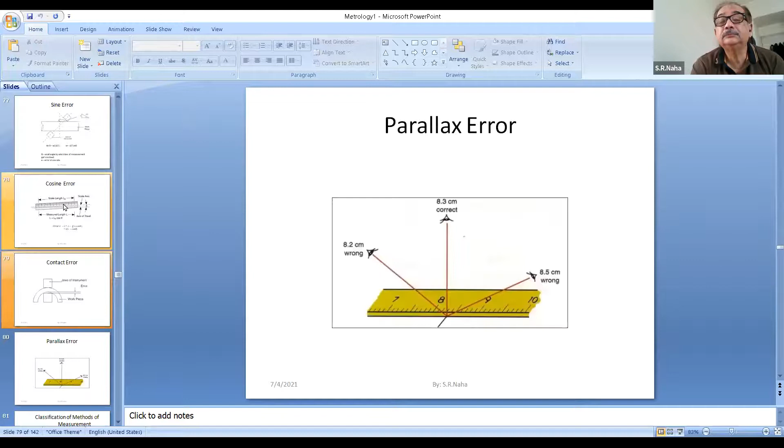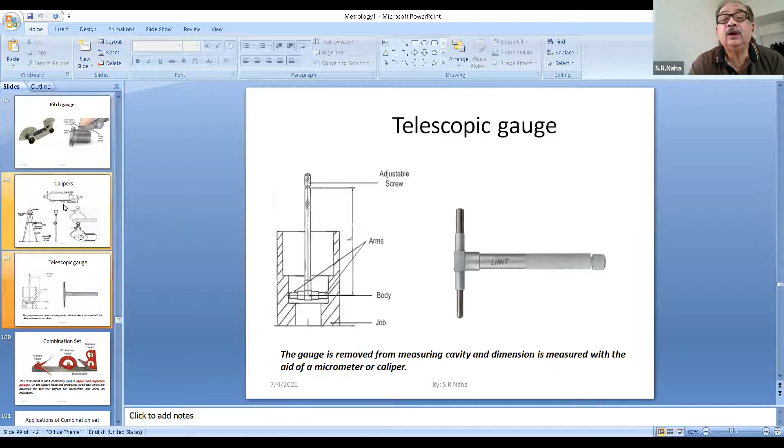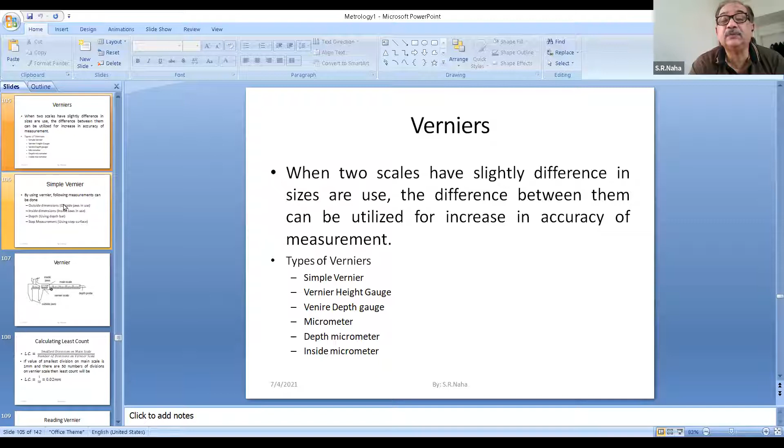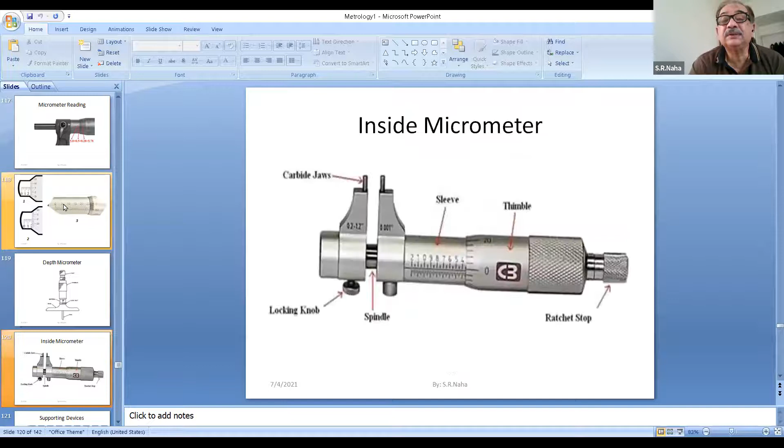In the last few classes, we were discussing the different instruments used for linear measurements. We saw some non-precision type instruments, and then we saw some precision measuring instruments like vernier, different types of vernier scales like simple vernier scale, vernier height gauge, depth gauge, micrometer, and depth micrometer. So all these things we have seen about linear measurements.

I had shown in the last class a video of how to take readings out of a vernier caliper. From this week, the practical online practical classes will start, so I'll show how to take measurements with the vernier scale as well as with the micrometer. All these things we will cover in the practical classes.

Now all these things belong to what type? We know there are basically two types: one is line standard and one is end standard. Whatever we have discussed till now, these were all of line standard only. Now let us see the end standard also, because there we take the advantage of the two ends of a component. This supporting device we will discuss later on.

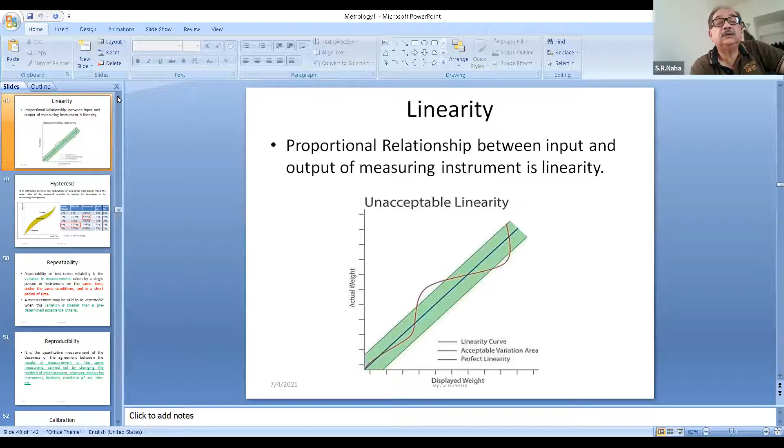So let us now move on to that, and for end standard, one of those is the slip gauge. In brief, I had mentioned in earlier classes about slip gauges. Let me go back to those slip gauge slides.

So we talked about the slip gauges. If I go back a little bit, this is the line standard and the comparison of different standards like line, end, and wavelength standard. We have seen some of the instruments that we use for line standard and end standard, as you can see here, examples are already there.

The steel rules which we used, the non-precision type, that was an example of line standard. For end standard, the vernier that we use there, we use the two ends of the component, so that comes under the end standard. Another one for end standard is slip gauges.

Now let us see what is the slip gauge, because slip gauges are very very important inspection tools, and these are also being used for measuring, mostly they are being used for measuring angle accurately. Let us try to understand what is a slip gauge.

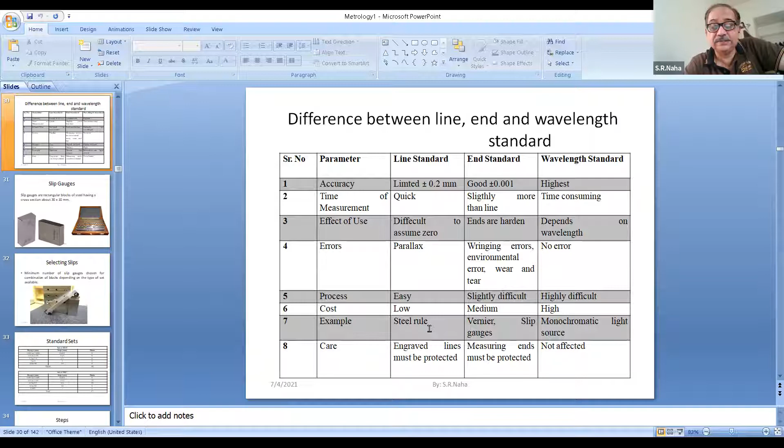The slip gauge, these are some rectangular blocks of steel having a cross section about 30 by 10 millimeters, as you can see here. Their thicknesses vary, and they are very, very precise blocks.

What is a slip gauge? This is also called gauge blocks. Slip gauges are known as gauge blocks, they are precise measuring instruments. These slip gauges are universally accepted as a standard of length. Slip gauges are rectangular in shape, made up of high-grade steel with very close tolerance. The working face of any slip gauge will be made truly flat and parallel.

Slip gauges will undergo hardening to resist wear and tear. They will be further heated and cooled down successively to remove the hardening stresses induced during the hardening process. The slip gauge can be made up of tungsten carbide because of its extremely capable hardness and wear resistance. The size of the slip gauge is permanently marked on any of the measuring faces of the individual slip gauge.

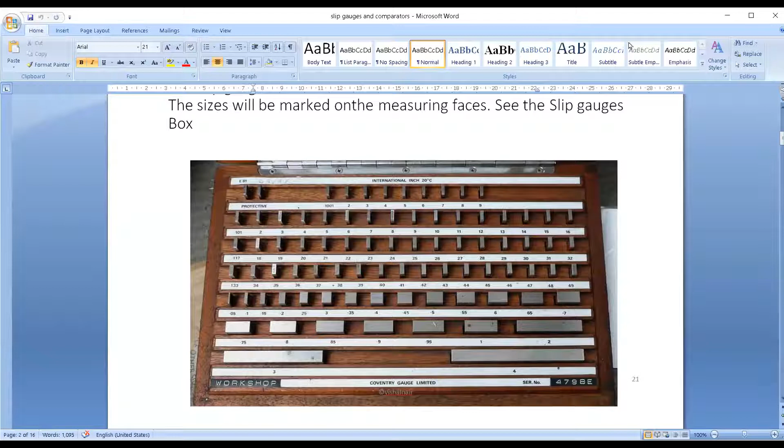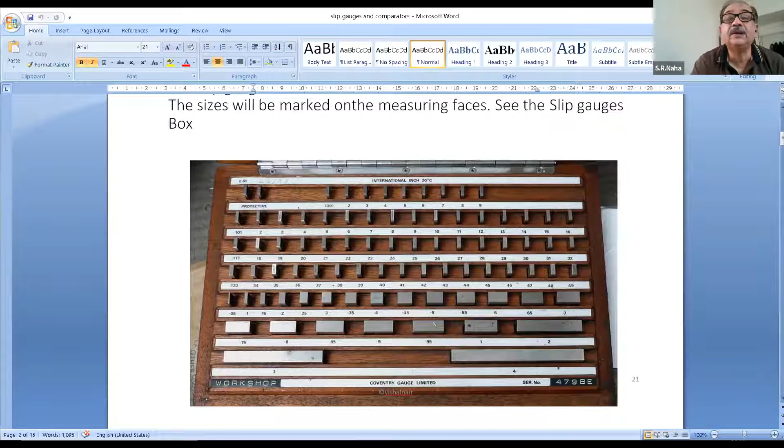Let me share it again. As I was telling, these slip gauges come as a set, and the set comprises different sizes of slip gauges. The sizes are marked on the face of the slip gauge, as we have seen in the presentation. This comes in a box, as you can see here, with different sizes. All these things are different sizes of the slip gauge.

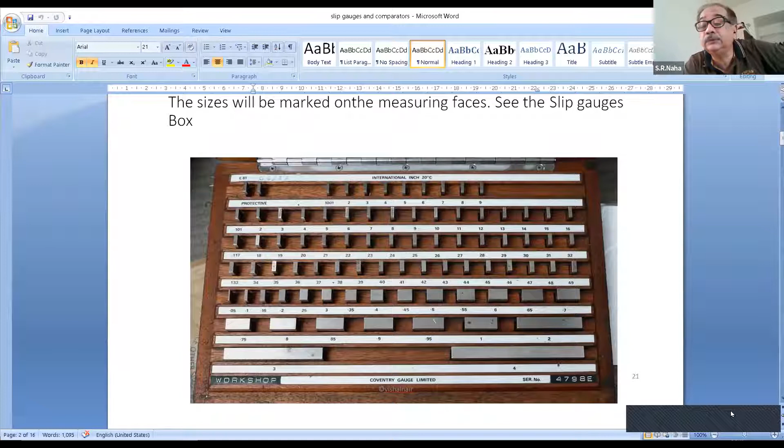Now if I go back here, well this is the same as this one. Now when I talk about this, you see these are the standard sets you will find.

This comes as a set, as I mentioned earlier. As you can see here, this is a set of a metric set, we call it, because the dimensions are in millimeters. Normally you will find these two types of sets: one is a set of M45 and the other is M87. There are 45 pieces in one, and in the other there are 87 pieces.

How these pieces have been arranged: you find from 1.001 to 1.009, and then 1.01 to 1.09, 1.1 to 1.9, 1 to 9, 10 to 90, and then steps. The step is 0.001, meaning the first one is 1.001, the next will be 1.002, and so on till you reach 1.009, which gives 9 pieces.

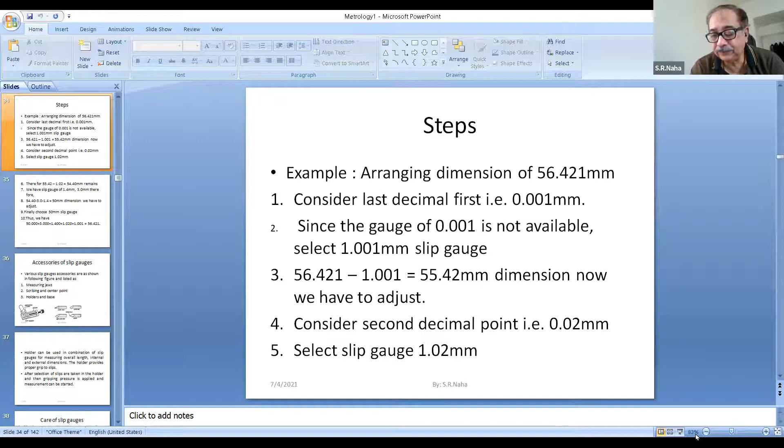So this is how we arrange slip gauges, one above the other. Now let me go back to this again. I'll give you an example now. We have to make a dimension of 56.421 millimeters with the help of a set of slip gauges. So how can we make a dimension of 56.421 with the help of slip gauges?

This definitely requires not one, but several slip gauges to attain this particular value, and the method that I will apply is the ringing - one above the other, we will go on ringing. Now how do we do that? These are the steps.

Just remember these steps. Consider the last decimal first. What is your last decimal? 0.001, right? Consider this first. Since the gauge of 0.001 is not available, select a 1.001 millimeter slip gauge. Why? I'll show you. So 0.001 is not available in any of these particular sets, right? So what will we choose? We'll choose 1.001, okay fine.

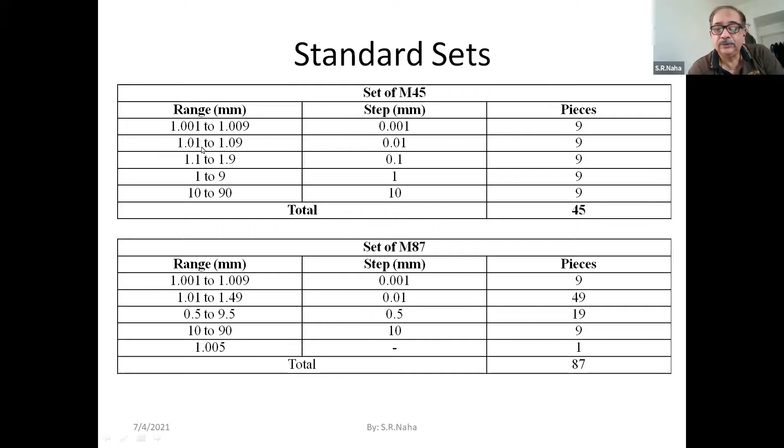Now, let us consider the second decimal point. One by one, we are reducing it. The second decimal point is 0.02. Again, from the slip gauge we know that we cannot get 0.02, but we can get 1.02, right? So we choose 1.02. Then what is remaining now? 55.42 minus 1.02, now we are left with 54.40 millimeter. Fine, now next step.

Next step is 1.4 and 3. Let us see.

1.4 and 3, both are there. So what do we do now? We are attacking on this 4.4 now. We are trying to remove this 4.4. For that, what you require is 1.4 and 3 millimeter. Both are available in the set, so we choose these two.

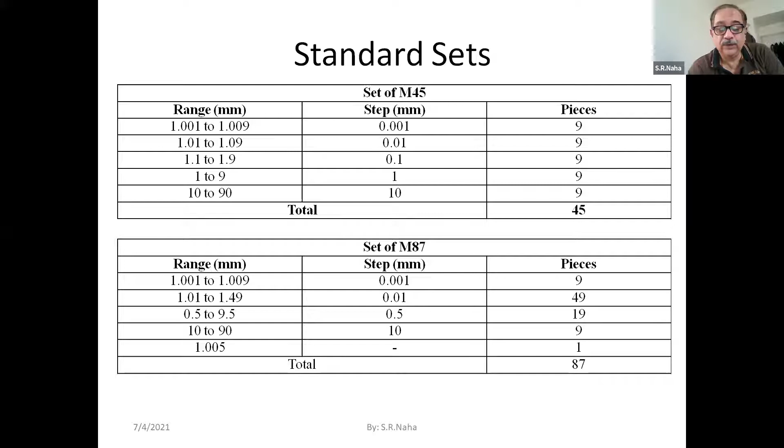Once we have chosen this one, now what is left here is a 50 millimeter dimension. Now this we have to adjust. Do we have a 50 millimeter dimension? Yeah, we have 10 to 90. So we can have 50 millimeter size also.

So what do we do now? As you can see here, to get a value of 56.421, we can select these slip gauges like this: 50, then 3, then 1.4, then 1.02, then 1.001. If we add them up, this is 56.421.

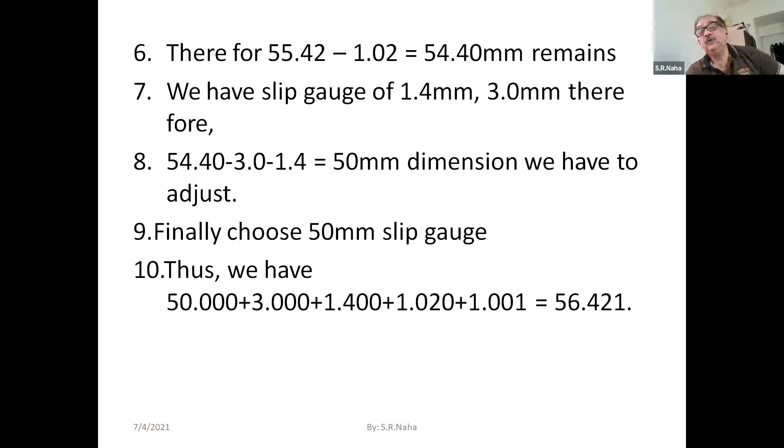And how do you fix them? By the method called ringing, one above the other. By ringing, when we do this, this gives us the value 56.421. If in this one you can set this particular height, and you know the center distance of the sine bar is available, with the help of this we know sine theta equals perpendicular by hypotenuse. So this is the perpendicular, this is the hypotenuse, and that is why this is known as sine bar. We can calculate it out.

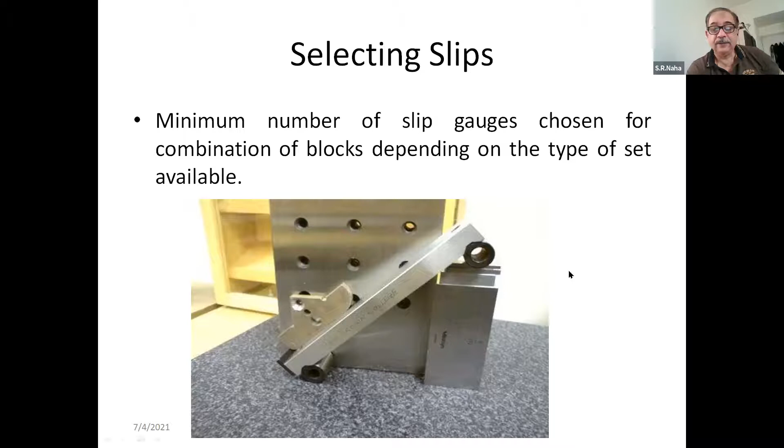Okay, so this is what is a slip gauge. Just a minute.

Now, whenever we are doing this thing, let me go back again to the presentation. Whenever we are setting up this measurement, utmost care should be taken so that the surface on which we are setting up all the devices for measuring this particular angle should be the same. So I will show you here.

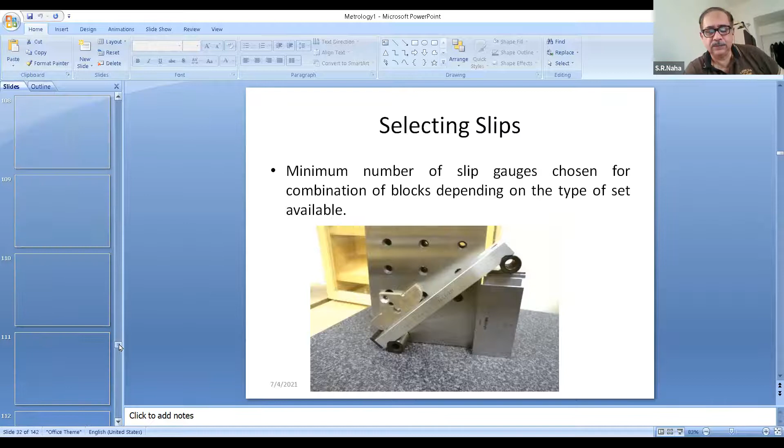There are some requirements whenever you take a measurement. It's not only in the case of this one, I'll show you. You see, these are the supporting devices that you will be requiring. Whether you are using a sine bar, a depth gauge, or a height gauge, whatever that may be, you require this sort of supporting devices. And what are there in the supporting devices?

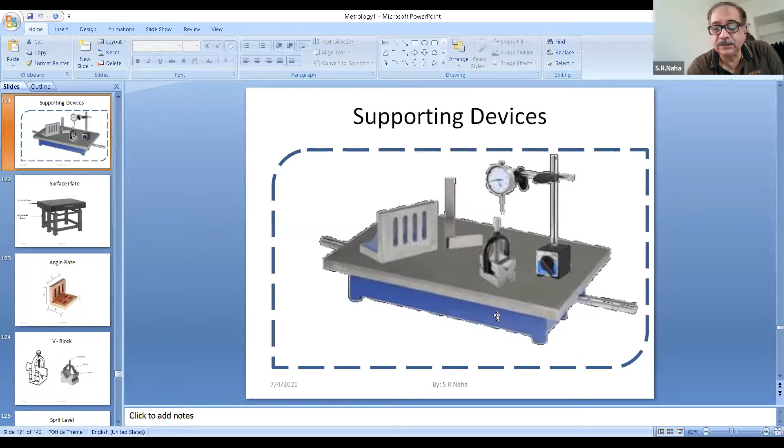There's a plate here, as you can see. There is a plate here, right? Let me enlarge it. Yeah, there is a plate. This is a surface plate. We call this thing a surface. We consider that this is a very smooth surface.

Okay, and let us say one by one. The first thing that you require is the surface plate. Yeah, this is the surface plate. There are some adjustable stands so that you can set your surface perfectly horizontal, right?

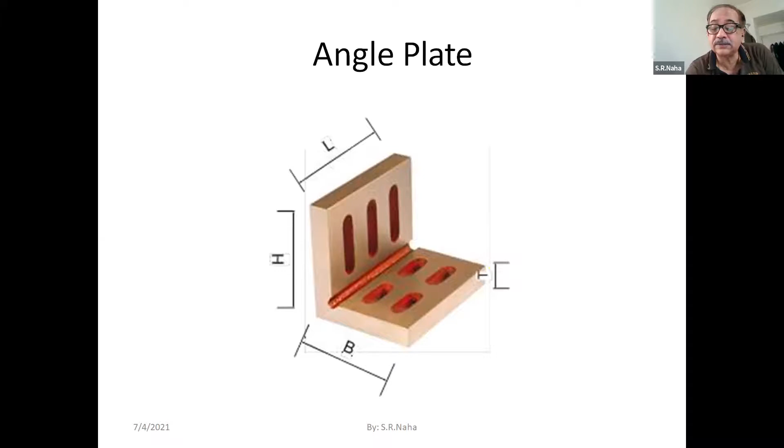Then you have the angle plate. I have shown you in the experiment for finding out the angle with the help of slip gauge. We have used this angle plate to fix the job onto that one. So what happens here? You see, one face is being placed onto the surface plate, and the other vertical surface is being used for clamping either the job or the instrument, so that you can get a perfect right angle, right?

Then you have the V block. If you have some circular one, then we use a V block like this. This is also placed on the surface plate, and then we put this thing like this. This is very important.

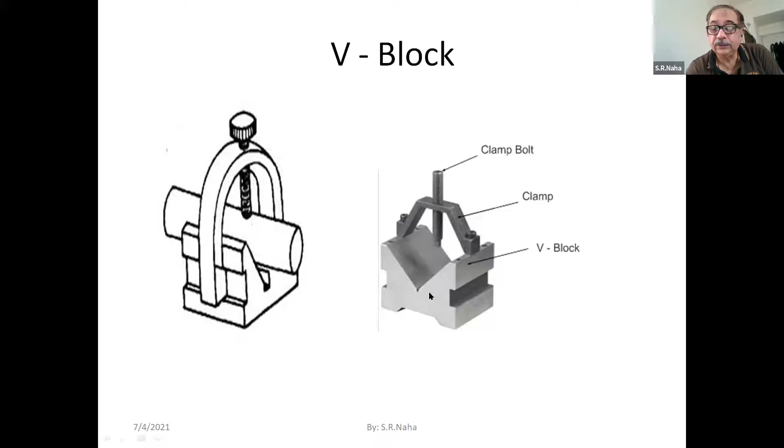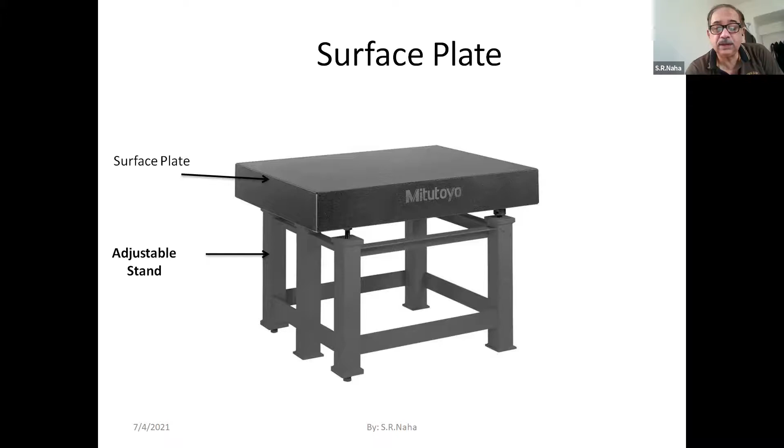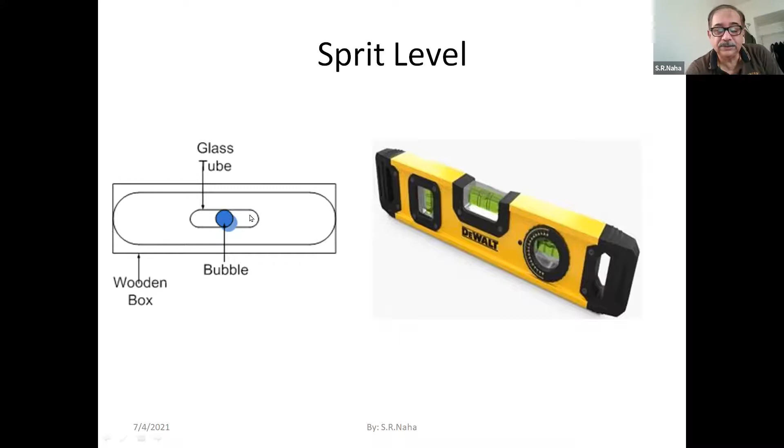How do you support? This is the spirit level. Why is this a spirit level? I mentioned that if you have to see whether this is perfectly horizontal or not, how you can check it with the help of this spirit level. If it is horizontal, the bubble should be at the center. If it is not, the bubble will move either to this side or that side. So this is the spirit level.

So these are some of the supporting equipments that you require whenever you take some measurement. And it is the same thing here also, this surface plate. And what is a surface? In metrology, if I can define it, the surface plate is used as a measuring base or a datum surface for testing the flatness of surfaces.

The surface plate forms the basis of measurement, remember. Surface plates are widely used wherever inspection is carried out. So whenever inspection is being carried out, you must have a surface plate. You cannot just use your table or whatever. Apparently it looks like a very flat surface, but no, you should not do that. You must have a surface plate and keep the item on the surface plate for inspection.